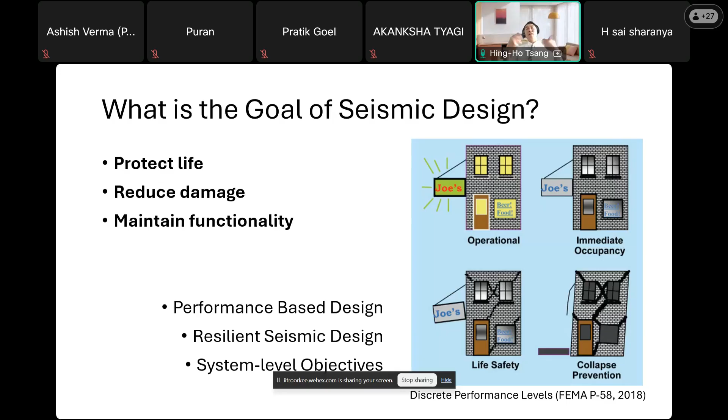And then the next thing is probably something structural designers are familiar with. But in case some geotechnical engineers might not know much about the evolution of seismic design of structures, this can be a very brief introduction of what has been happening from the structural design perspective.

When we talk about seismic design half a century ago, before the 1970s especially, we were always talking about designing higher strength of the members. Or if existing structural members are considered vulnerable or weaker, then we strengthen them. So strength was the number one important design criterion when we talk about seismic design half a century ago.

But starting from the 1970s, people or researchers became more aware of the importance of talking about the deformability of our structural members, and of course that comes together with the ductility of the structural members. But at the end of the day, it's about how deformable our structural members are.

And apart from deformability of individual members, we also look at the flexibility of the whole structural system at the global level. So from here, we can see that design is gradually moving from strength to deformability and flexibility, and at the same time also moving from member-level design to structural global system-level design.

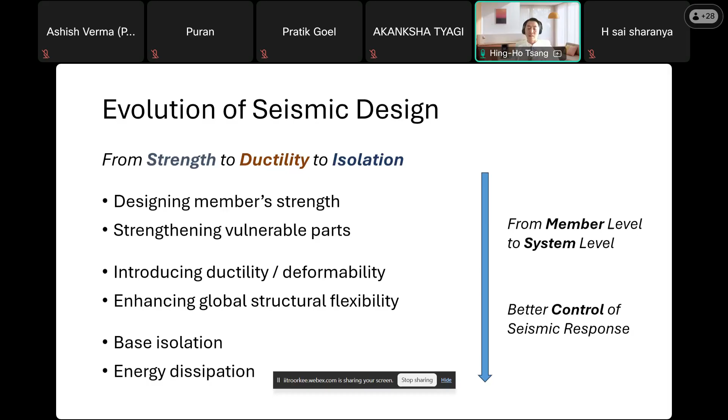And later on, we also have increasingly popular technology such as base isolation, and also using dampers like energy dissipation devices. So we are actually moving from member to system level, and we aim to control seismic response rather than just resisting seismic actions.

So the next question is, if we know that we are actually aiming to fulfill certain system-level objectives, then as structural engineers, for example, if asked to design building structures like frame structures, what a structural engineer would do is to treat the ground as a boundary condition, which is kind of the basic case, especially if the ground is rigid enough to be treated as a fixed ground, fixed support. Then the design would be very simple.

And what they do is to detail all the structural members, sizing and detailing. And of course, some better structural engineers would consider the uncertainties of the ground, whether there may be soft soil, there might be uneven or unequal settlement across the whole foundation. A structural seismic designer knows that we have to take into account soil conditions and quantify the site effects on seismic loading.

So this is usually where structural engineers stop in seismic design. But we know there are a lot of things underground, right? And of course, in this audience, most of you are geotechnical engineers, so this is not something strange to you. You know there could be basement structures. So should a basement be considered as a structure or as a foundation structure? Should that design be carried out by a geotechnical engineer or a structural engineer?

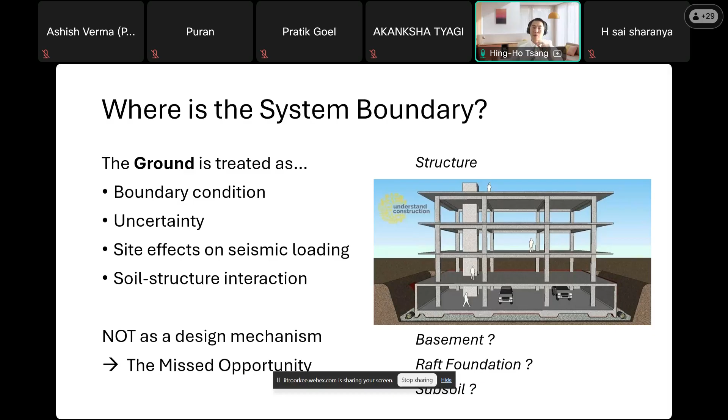And this is the topic that I'm going to talk about today. Instead of just treating soil structure interaction as a behavior or as a passive mechanism, we deliberately use it as a design mechanism because this has been a missed opportunity. And so this is the kind of new perspective that I'm going to share with you today, that is to treat the ground as part of the seismic design solution.

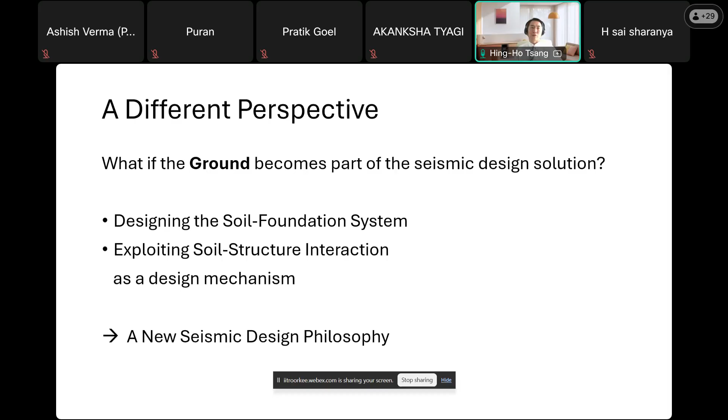We deliberately design the soil foundation system. We exploit the soil structure interaction, both inertial and kinematic soil structure interaction, as design mechanisms. And this can be a new seismic design philosophy. I actually introduced the term geotechnical seismic isolation in 2009 in the book chapter, and I defined it as a category of seismic isolation techniques that are in direct contact with geomaterials, and of which the isolation mechanism primarily involves geotechnics.

In the past 16 years or so, I myself, my research group, and also a lot of researchers around the world have done a lot of work surrounding this theme. Some of them have explicitly used the term geotechnical seismic isolation and some haven't. But we can see that there have been an increasing amount of research which are thinking along the same direction. So I have synthesized all these ideas, a lot of different methods and approaches, and created a comprehensive framework for understanding different types of geotechnical approaches, and also categorizing them into 4 branches that I'm going to introduce to all of you today.

So what I would like to do is to first of all introduce briefly these 4 branches of GSI systems, and then under each of these systems, I would also share with you our research findings and also the research that is conducted by different researchers around the world.

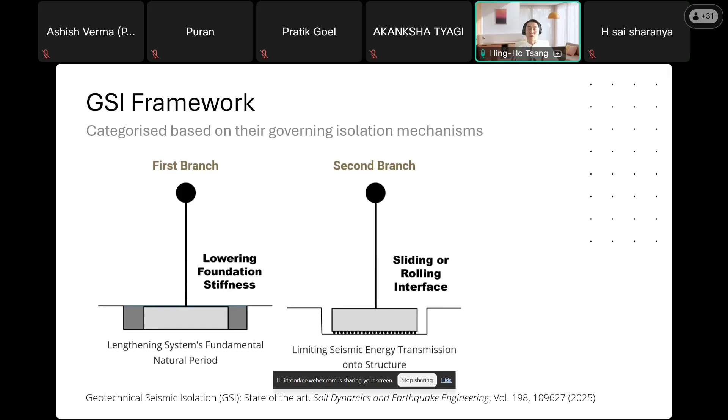And then for the second branch of GSI system, we are talking about introducing sliding or rolling interface, so that it can limit the seismic energy that is transmitted onto the structures. So that is basically decoupling the structures from the ground.

And then in the third branch, we are talking about more like kinematic soil structure interaction. We modify the seismic wave, and of course, at the same time, if the materials surrounding the foundations have a high damping property, we can also dissipate more energy.

And then for the fourth branch, which is something that you might be more familiar with, is the so-called rocking foundation or rocking isolation system, that quite many other researchers have been studying. And so that is due to a series of conversations with those key players in the field of rocking foundations, including Professor Ioannis Anastasopoulos.

And so we talk about incorporating this rocking foundation into this GSI framework, so that the whole system will become more comprehensive. And as you know, rocking foundation is about under-designing the foundation system so that they control where failure would occur. Usually it would occur at the tip, at the edge of the foundation. The soil surrounding the edge of the foundation would fail, so that it facilitates rocking and uplifting. And in some cases, it would allow sliding behavior as well. So these are the four branches of GSI system.

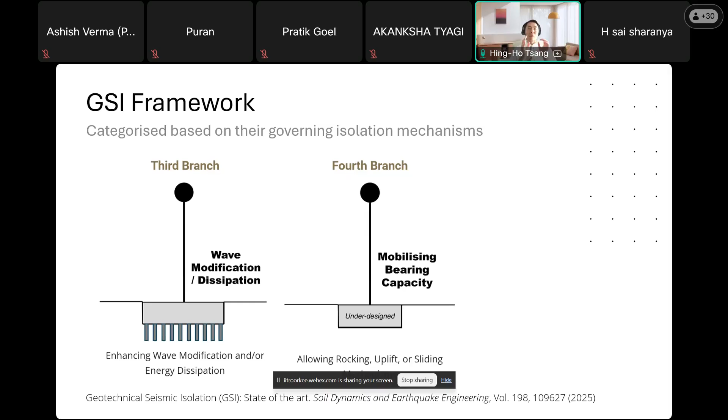And because I assume many of you are more familiar with the fourth branch about rocking foundations, my presentation will focus mainly on the first, second, and third branch. And before sharing with you our research findings and different research activities that were happening around the world, I would like to share with you something really interesting, that is kind of an analogy or a comparison with existing structural seismic design approaches. I'm sure every one of you knows about the use of isolation bearings, especially the use of multi-layer rubber bearings between the superstructure and the foundation system.

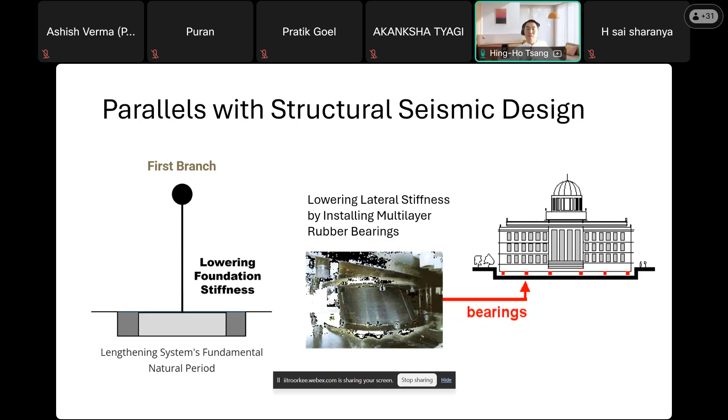So those are between superstructure and foundation system, and this is the very commonly used technology nowadays. For GSI, we are talking about introducing low stiffness or soft materials between the foundation and the surrounding soil, moving this even closer to the ground, which is fundamentally different from the structural design approach. So this is a clear analogy, or parallel, between the geotechnical and structural approach.

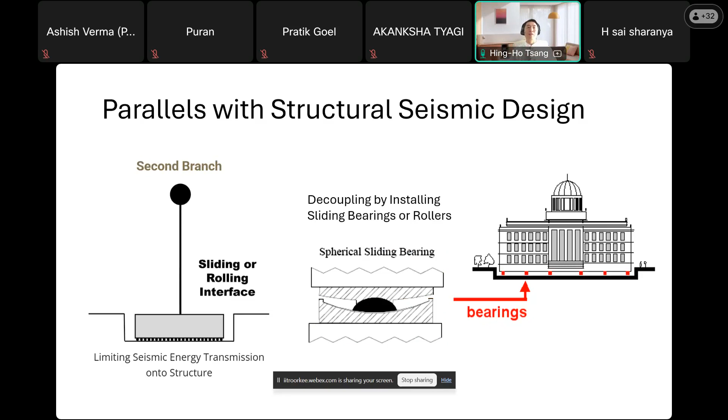The second one is actually similar. I'm sure many of you have seen sliding bearings installed between the superstructure and foundation system. The second branch of GSI system operates in a similar way, by introducing a sliding or rolling interface. And then the third one is about modifying the ground.

In the structural design approach, we modify the structural dynamic properties by introducing dampers or energy dissipation devices. It's not exactly the same, but in a similar way, because it also modifies the behavior of the structural system. In GSI, we modify the ground by modifying seismic wave propagation through the ground properties, and both approaches can also dissipate energy through hysteretic damping, for example.

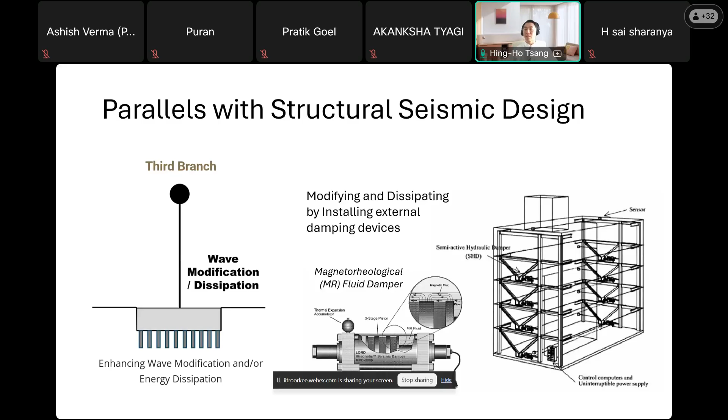The fourth branch, which probably more of you will be familiar with, is analogous to the capacity design principle in structures. For structural design, we deliberately select locations where we want the failure mechanism to occur, introducing plastic hinges through special detailing at the ends of beams, for example. In the fourth branch of the GSI system, we deliberately design failure at the edge of the foundation system, so that there will be soil failure.

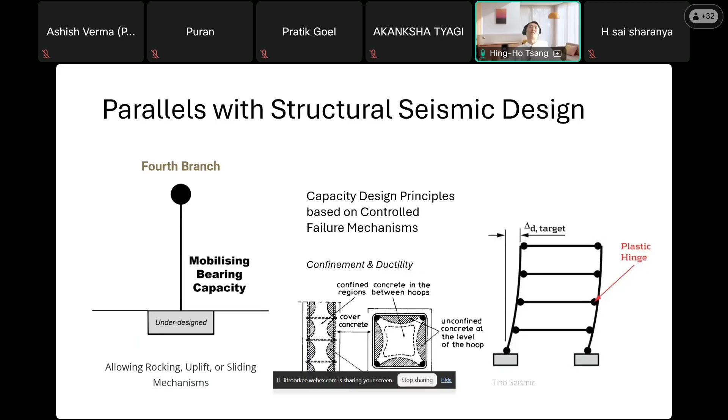So the concept is actually similar, and that's why we can see that for all four branches of the GSI system, there are parallels with the structural design approaches—the four major structural seismic design approaches we use nowadays. So we have quite a comprehensive framework that integrates both geotechnical and structural seismic design methods.

To summarize, GSI, Geotechnical Seismic Isolation, is a new design philosophy that extends seismic design into the ground, into the geotechnical domain. In the past, as geotechnical earthquake engineers, we mainly studied the dynamic properties of soil and the behavior of liquefaction. GSI tries to expand geotechnical earthquake engineering so that geotechnical engineers can play a more significant role in seismic design.

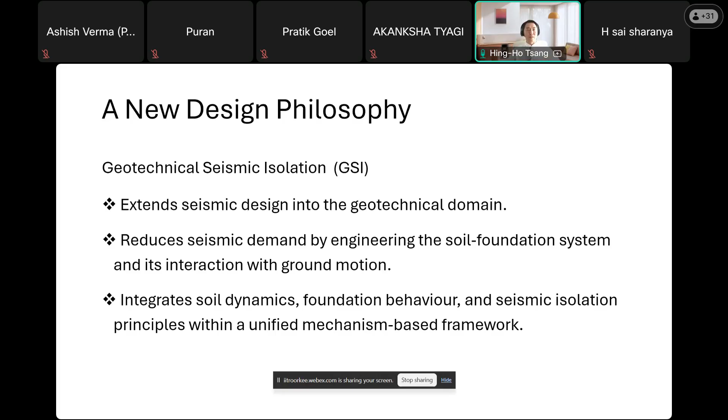To do this, we engineer the soil-foundation system, or engineer the soil-structure interaction with ground motion, in order to reduce seismic demand. It's actually quite a multidisciplinary field of study that integrates soil dynamics, foundation engineering, and seismic isolation principles, and it also involves a lot about material properties and materials engineering. All of this can be operated under a unified framework based on mechanism.

So what I will do is introduce a series of different studies conducted by many different people. Because of the broad background of the audience, I won't include theoretical stuff or equations. I want everyone to be able to follow every slide, and mainly to look at the possibilities of GSI and what kind of research we can do to advance GSI as a branch of earthquake engineering.

Under the first branch, which is also the most commonly researched branch of the GSI system, based on modifying the foundation soil to make it like a more flexible base or foundation—my research group has done a series of centrifugal testing and also 1G shaking table tests. For example, the subject structure can be a building frame, or it can even be energy infrastructure like transformer structures, which you can see on the right-hand side of this slide.

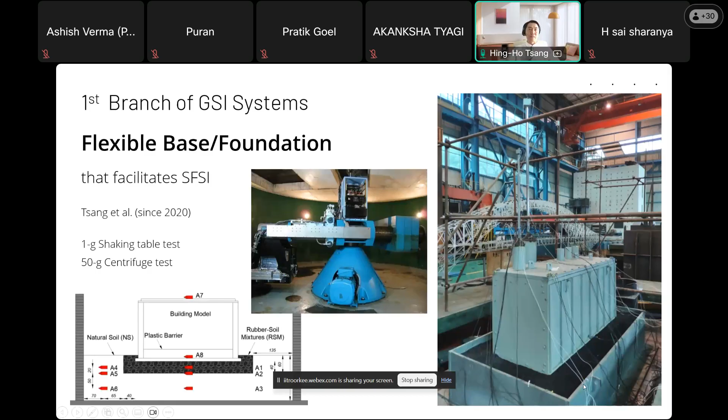For example, we did centrifugal testing based on the use of gravel-rubber mixtures, which is the most commonly researched material for the GSI system. We did 50G centrifugal testing, and this slide tries to summarize the ultimate effect of the system: the structural demand can be reduced by, on average, 40 to 50%. At the same time, I'd like to bring to your attention the amplification of the foundation response.

That might be seen as something not favorable, but if you look at the extent of amplification of the foundation displacement and the absolute amount of displacement, they are actually not excessive. They are definitely controllable. They can be easily tailored for in the design process.

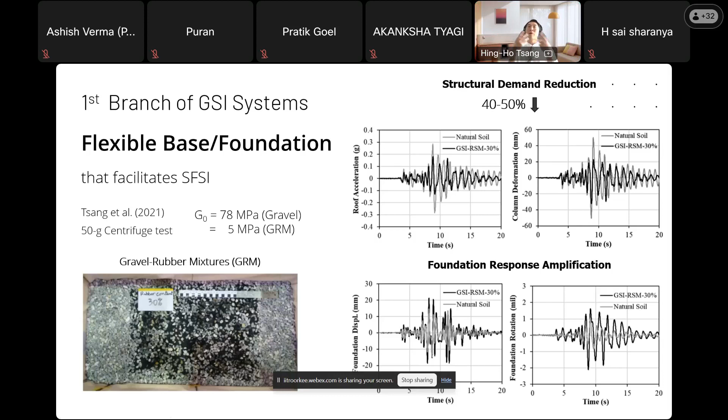Both the foundation horizontal displacement and also rotation can be amplified, which are actually beneficial. It's similar to the use of base isolation bearings because the whole building actually also moves quite significantly, but the structural demand, the interstory drift, and the deformation of structures can be significantly reduced. So the mechanism and the effect is actually similar.

Apart from gravel rubber mixtures, we also explore the use of other materials. Rubber materials might not be very well accepted in some parts of the world for foundation engineering, right? But as we all know, as geotechnical engineers, we know that EPS is a very commonly used, well accepted material. Material properties is more well known.

We can use the whole piece of EPS block that some of my research projects are dealing with at the moment, but I have also done centrifugal testing with the use of EPS bead sand mixture. And in this case, we can also reduce the modulus of the foundation soil.

As you can see on this slide, on the right-hand side, we can see that the rocking stiffness has been significantly reduced by close to almost 10 times compared to natural soil, like in this case sand. And then we can also see a further reduction of the rocking stiffness when the shaking level is higher.

This is an advantage because when we are talking about stronger earthquake shaking, we would expect larger foundation rotation. And because of the further reduction of the rocking stiffness, structural demand can be further reduced, which is actually a benefit of it.

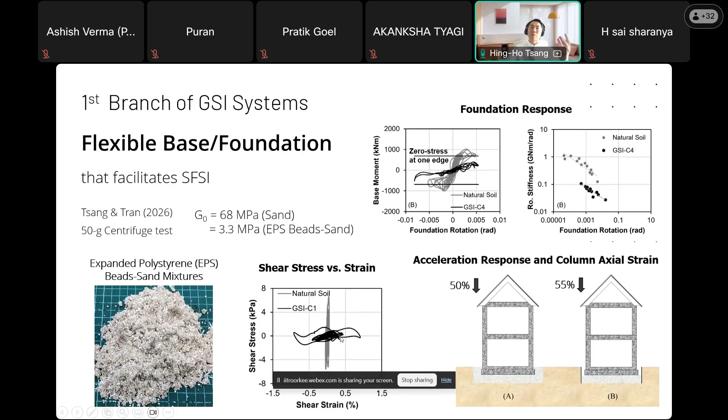And at the same time, we can also look at material properties. We can look at the hysteretic loop, showing a larger hysteretic loop. That means there will be a higher level of damping.

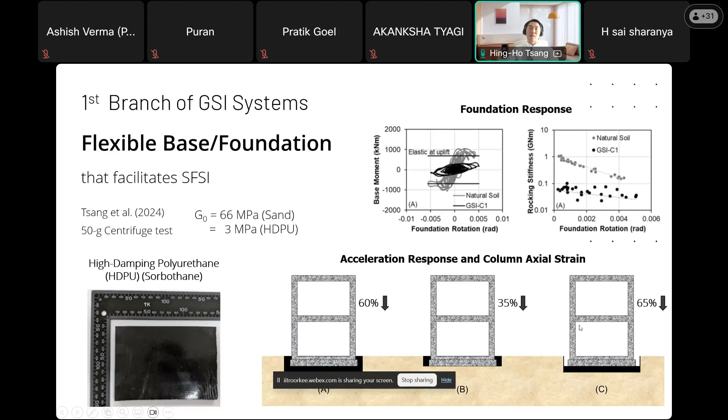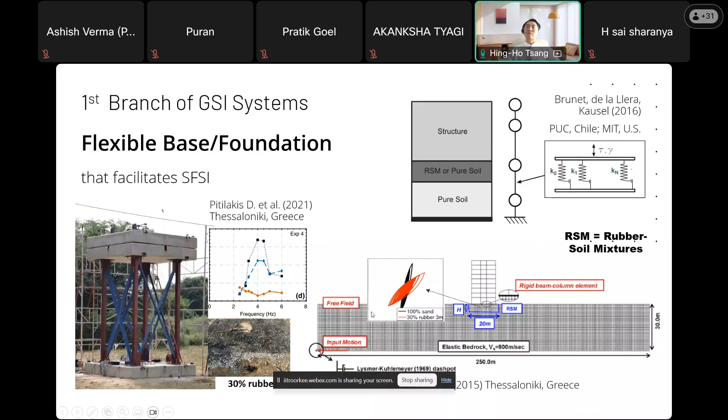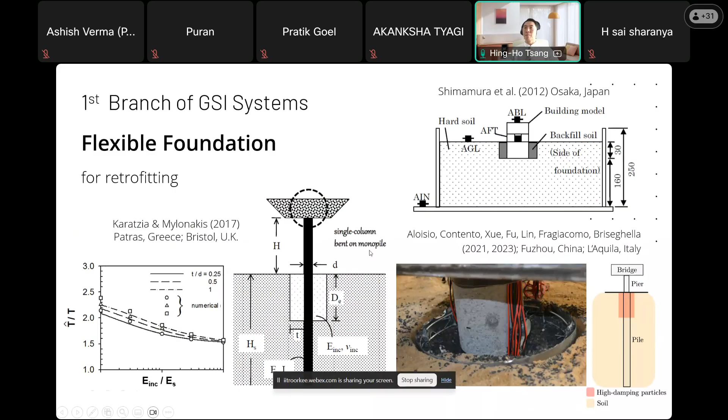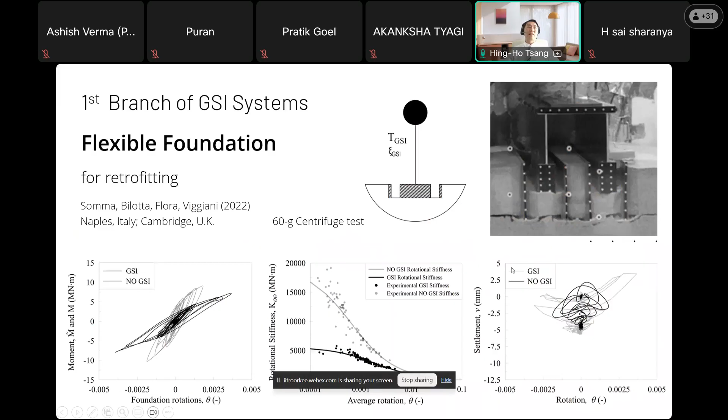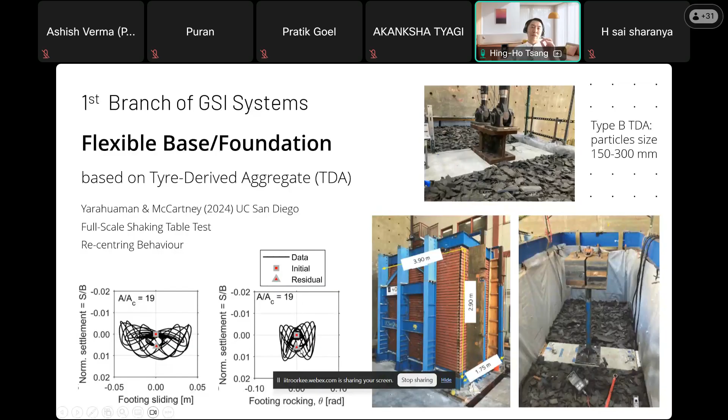More importantly, on the horizontal axis we're showing the sliding and rocking of the foundation. The square symbols show the initial location, which is zero, and the residual is after shaking. After shaking, we do not observe significant or even minimal sliding and rocking. This is very encouraging and very promising to see such a result.

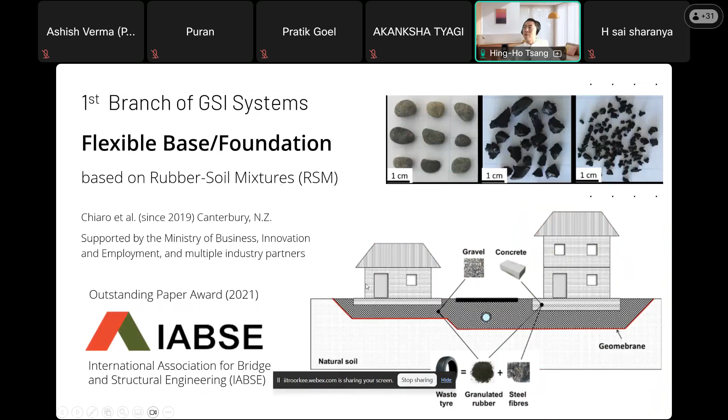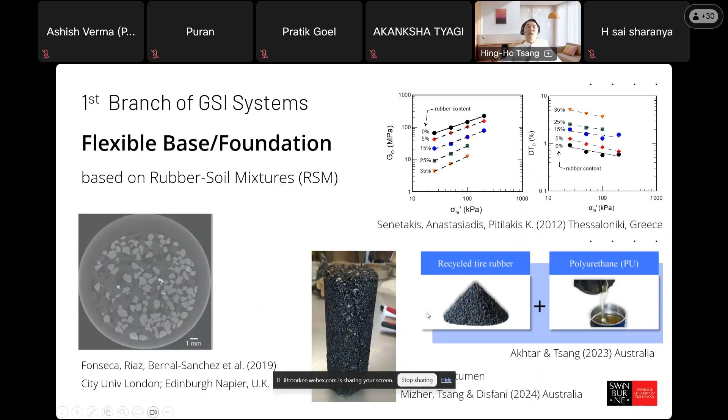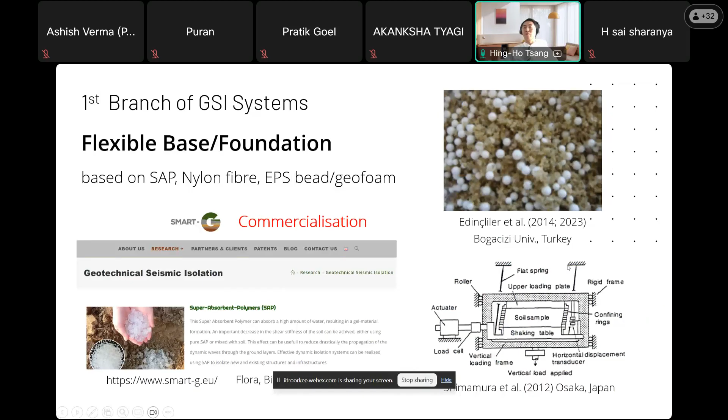Apart from the commonly researched material of rubber, there is also research on the use of super absorbent polymers. This Italian group in Naples has actually commercialized their technologies based on super absorbent polymers. The group in Turkey have explored the use of EPS beads and geofoam as well. And the group in Japan has worked on nylon fiber to improve the ductility of the mixture.

I'm sure up to now a lot of smart geotechnical engineers would have a question on their mind: would there be concern about settlement, both at the static condition after building the structures and also during an earthquake? The good news is they are not excessive. The settlements are actually not excessive.

The most stringent design guide gave us a limit of 25 millimeters, and there is still quite a wide margin. A lot of design guidelines and codes of practice talk about 50 millimeters as the limit, so we are far lower than that.

During an earthquake, an interesting result is that because of the deformability of the materials, and most of the deformation has already occurred during the static case, there was just an additional 3 to 6 millimeters of settlement during an earthquake, which is even smaller than the settlement induced by earthquake shaking when we have natural soil, whether gravel or sand. The average settlement would be on the order of 10 millimeters for pure sand or pure gravel.

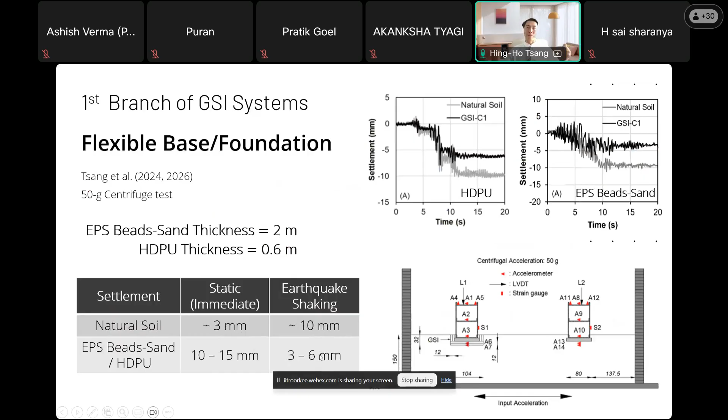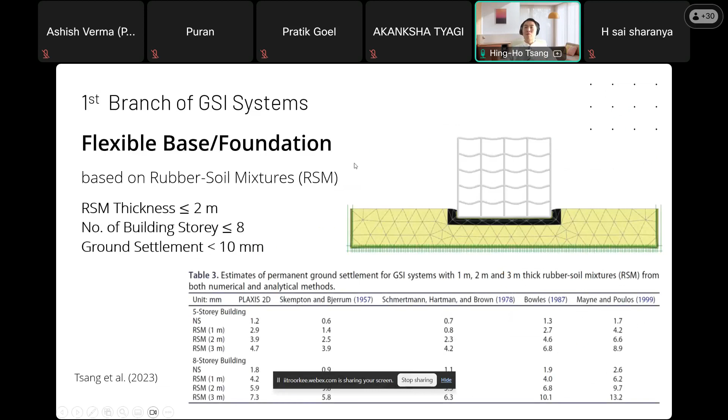With the use of the GSI system, settlement can actually be reduced. We measured this in centrifugal testing, and for rubber soil mixtures I performed analytical calculations and numerical simulation. We find that if we use rubber soil mixtures of thickness 2 meters or less, even up to a building of 8 stories, ground settlement will be smaller than 10 millimeters static ground settlement. This is definitely not excessive, and it is evenly distributed.

If there is still any concern about excessive settlement, your friends in IIT Madras have done research with sand rubber mixtures, and tried to introduce the use of GeoGrid to reduce settlement even further. Even before having GeoGrid, the earthquake-induced settlement was just 2.5 millimeters in their studies during shaking, and with the introduction of GeoGrid, they reduced the settlement to just 1.2 millimeters.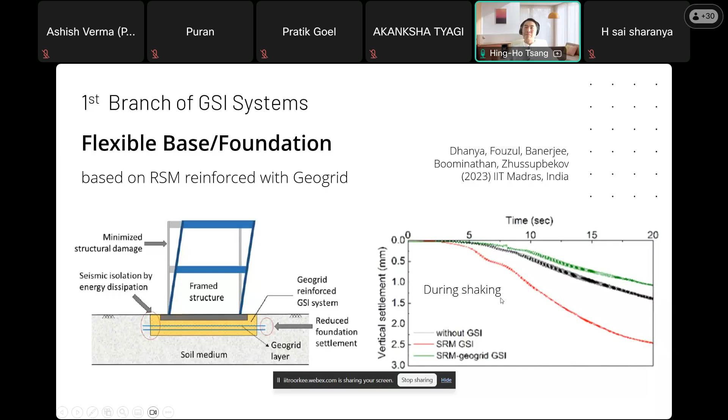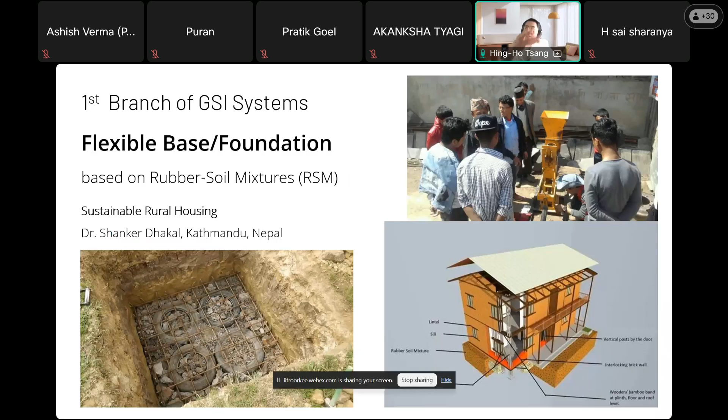In your neighboring country, Nepal, they have already introduced this technology to the industry and the community after the 2015 earthquakes, and have adopted it in some pilot housing and pilot facilities. This is just an example that they shared with me.

I have probably talked a lot about the first branch of the GSI system, because those are the most researched, and of course there are many more other researches done by other researchers. From here, I'd like to talk about the second branch of the GSI system, which is based on a sliding base.

A very significant study conducted more than two decades ago was done by Professor Yegian at Northeastern University in Boston. He and his colleagues introduced the so-called foundation isolation or soil isolation, now part of the GSI system. They experimented with the use of smooth geosynthetic liners like geomembrane to allow sliding between the foundation and soil, or between different soil layers, like the one shown on the right-hand side.

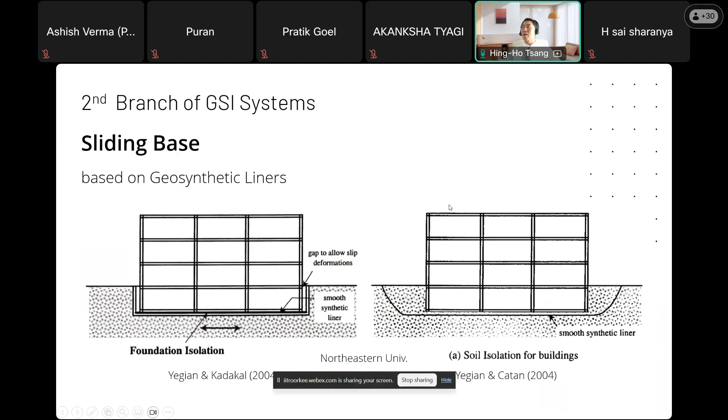This concept has also been further explored with the use of different materials like PVC, sand, or roller bearings. These were explored by researchers mainly in Bristol, and also in collaboration with some researchers in ETH Zurich.

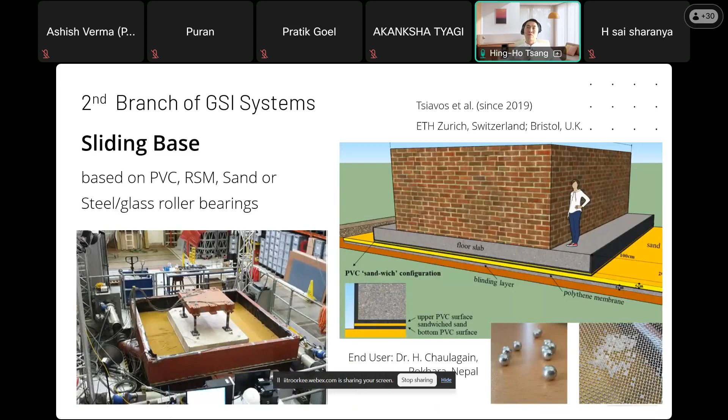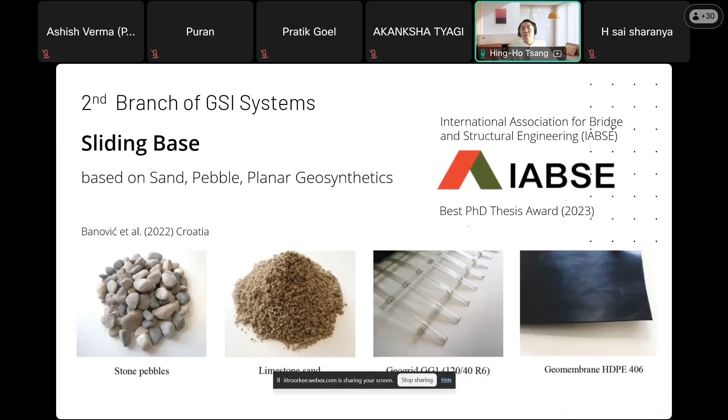And then also another group of researchers in Croatia have done very interesting research exploring the use of different materials like stone pebbles, limestone sand, and different types of geosynthetics. Their work was mainly done by a former PhD student, Ivan Banovic, whose PhD thesis received the best PhD thesis award from IABSE.

There are also hybrid isolation systems involving both geotechnical seismic isolation and structural isolation, targeting rural brick masonry house models. We can see that the use of a gravel pad underneath the foundation is a geotechnical approach, and there is also a sliding layer at the ground level between the brick walls and the foundation structure.

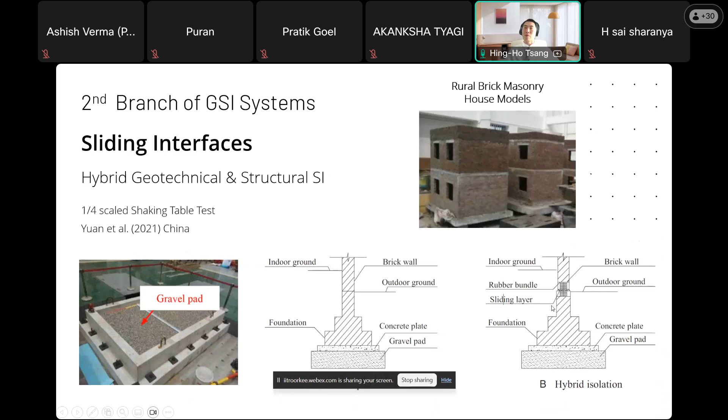In the third branch of the GSI system, there could be a lot of varieties we can imagine, because there are fewer limitations. You can do whatever to the ground as long as it is practical and can reduce ground shaking or reduce structural demand. For example, in a paper published in 2009 by the Thessaloniki group, they considered different stiffening approaches and also different softening approaches.

The three at the bottom are softening approaches. They are different from the first branch because we would expect much less interaction with the filtering layer. This soft material shown in diagram D is a few meters away from the foundation, so there will not be much inertial soil structure interaction as we see in the first branch.

But at the same time, this is more like a filtering layer to filter or isolate the seismic wave, or it actually reflects seismic waves. Then there are trenches, which are typical for filtering as well. And this is what they call a caisson, which is also more for filtering seismic waves. So this can be considered the third branch of the GSI system.

Later on, a group in Naples and also in Cambridge took this idea further and did centrifuge testing to observe the results.

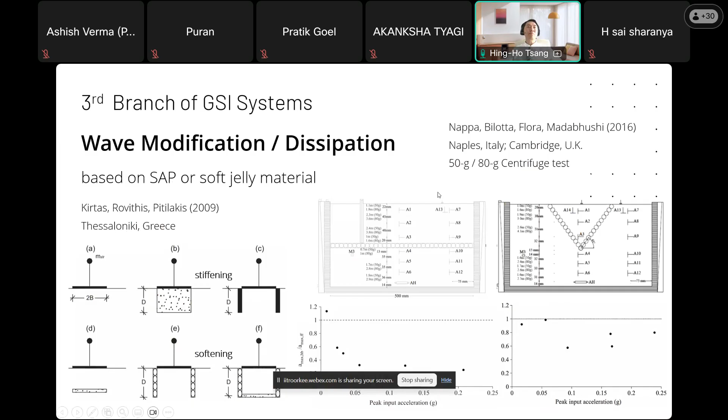There are also different approaches and types of testing done, for example, by a group in Japan in collaboration with a researcher in Auckland. They measured the change in maximum acceleration in the sample and actually did pseudodynamic testing, meaning they did both experimental and numerical simulation at the same time, looking at maximum acceleration and pore water pressure ratio to assess liquefaction potential, using pure rubber and rubber-soil mixtures. They found they can significantly reduce both maximum acceleration and pore water pressure.

More recently, we have looked at the use of a filtering layer with rubber soil mixtures, not for the first branch but for the third branch. We observed the filtering effects, and we also looked at the reduction of excess pore water pressure ratio and liquefaction-induced ground settlement. We just published a paper very recently on these new results based on OpenSees modeling, which I believe many of you are familiar with.

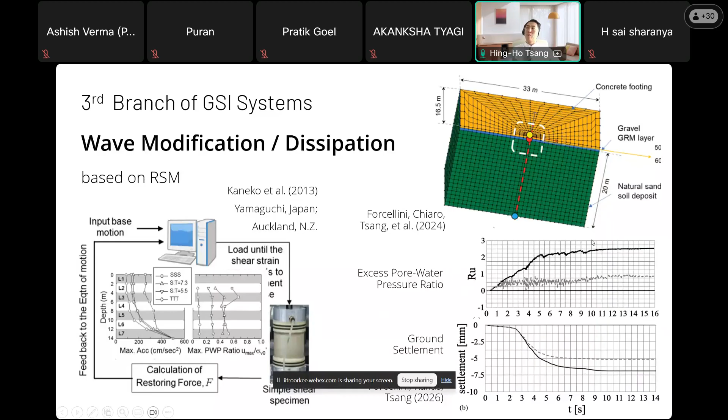There are also some other interesting academic-industry collaborations. This work is quite significant as it's supported by a major chemical company, Master Builders, which also supplies materials for ground improvement. In Italy, they tried to explore possible use for retrofitting existing heritage structures, such as a cathedral. They drilled holes through the foundation system so it would be less intrusive and invasive, and injected expandable polyurethane foam, creating a series of polyurethane foam columns underneath the foundation to create a GSI third branch system that filters or scatters seismic waves.

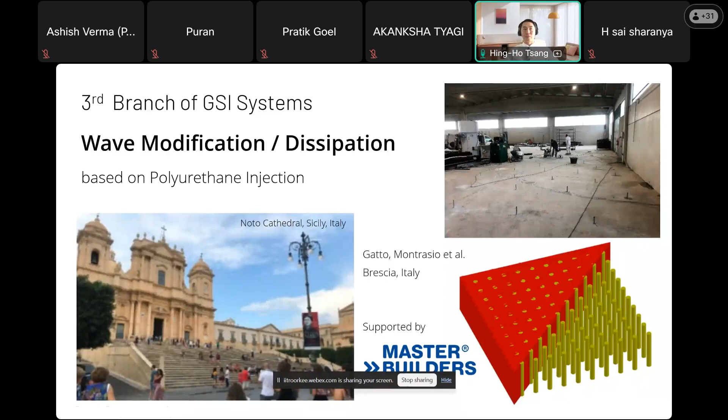There is also research on the use of trenches, which can be unfilled or filled with EPS geofoam or rubber-soil mixtures. And there is another group of researchers doing research on the use of metamaterials or periodic foundations. These can also be considered GSI systems of the third branch.

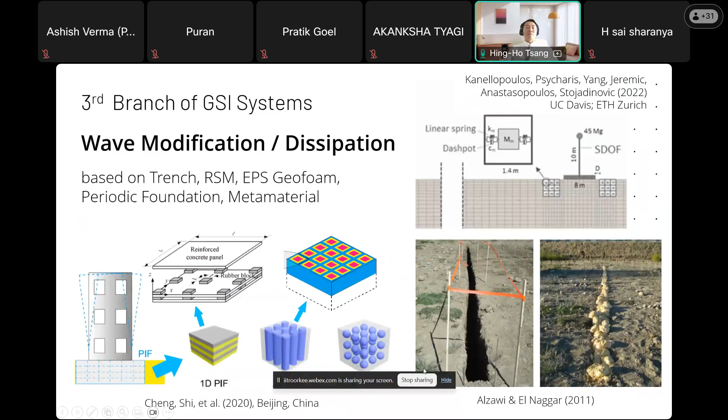So these are the streams of different research activities and some of the applications people have been exploring over the past two decades or so. In a nutshell, in a one-page summary, we are talking about a conceptual framework of GSI systems categorized based on their governing isolation mechanisms.

And in fact, the isolation mechanisms of these 4 branches of systems are not mutually exclusive. Some of them can actually work together in synergy so as to improve the isolation effect to further reduce structural demand.

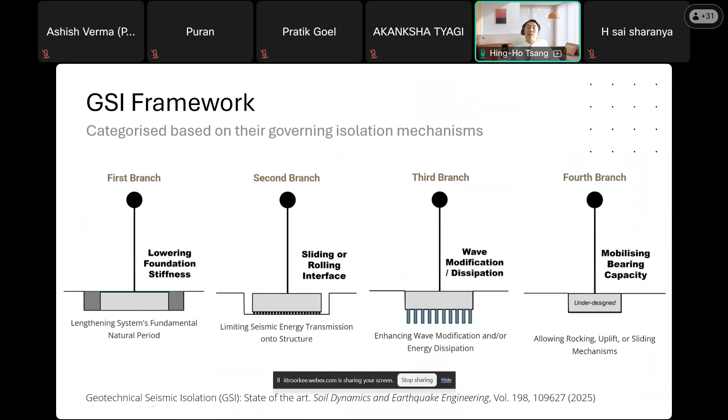This paper has open access, right? So I would encourage that everyone can have a look at this paper.

And I can observe that this is going to be even increasingly popular, because I'm on the editorial board of Soil Dynamics and Earthquake Engineering, and I just received a report from the publisher. One of the slides is showing the most downloadable paper amongst papers published in 2025, the year this paper is published. And this paper was the second most downloaded paper since it was published. So I'm sure that it is going to be even more popular, and it is going to change practice, hopefully.

So apart from this state-of-the-art paper, we have also published a special issue collecting a lot of advances of GSI systems, in the Bulletin of Earthquake Engineering just 3 years ago.

And then there's an ongoing special issue on geotechnical seismic isolation in the Geosynthetics International Journal. This is a very, very good journal of geosynthetics. I'm sure everyone knows it.

And the important message that I would like to share with you is that it's not only about earthquake engineering, it's also about the use of synthetic materials in civil engineering. So it's also expanding the use of geosynthetics for earthquake applications, especially for base isolation.

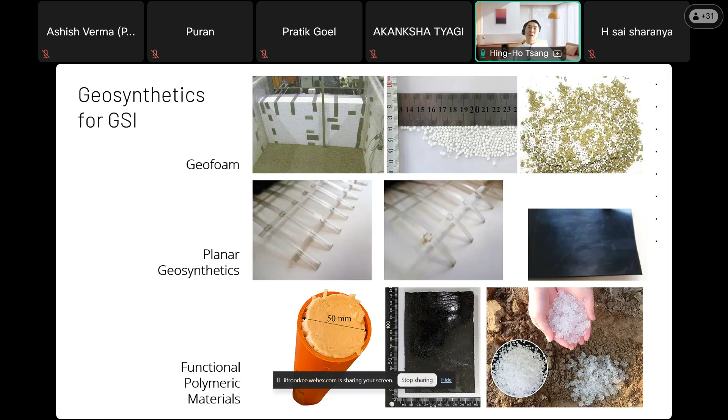And there are also some other activities that have been happening. For example, the special section of GSI in the 17th European Conference on Earthquake Engineering. And then there was also a technical section on GSI in the World Conference. We had about 30 papers in this section, broken down into 3 sections of a total of 5 hours. So you can see significant momentum in this direction.

And we actually also had a special section in the conference in Zurich 2 weeks ago, the International Conference on Physical Modeling in Geotechnics. So there are also a lot of interesting papers presented in that section.

And a few years ago, some of us, including many researchers in Europe, were very interested in gathering together during COVID time, especially at that time. And it started from a very small group when people liked to just interact and try to share knowledge. And then it has since grown to a more significant, larger group.

And I'm sure that you are able to see some of your friends from different countries, different institutions around the world. And of course, because the group has been growing, I haven't updated the slide to include all the faces here. So if you are also working along this direction, you are also welcome to join us in this global network.